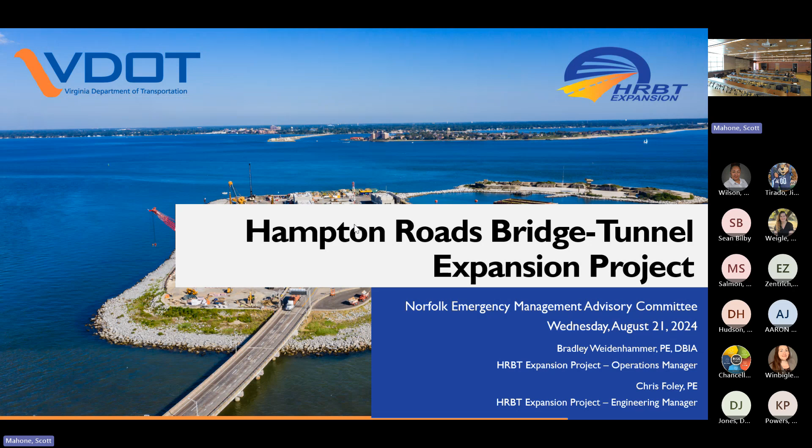So I'll give the first part of the presentation, kind of the overview of the project and some of the progress. And then Chris will follow me on some of the tunnel. Chris Foley actually works for a company called WSP, but serving as VDOT's engineering manager. We've got a team that's supporting VDOT with engineering support and construction oversight, across all the different disciplines, helping with things that come in from the contractor and construction issues.

Been in the area here for about 15 years. Most of the downtown tunnel projects. Done some tunnel inspections at one point in my career. So I've actually been in all the tunnels in the state. But I've been on the HRBT project now for 2 years. And I'm so excited to talk to you guys today and fill you in on some of the details behind it.

Great. If you could have that microphone going in and out, could you stand next to the podium there? Sure. Or if you like to walk around, you can carry that little microphone with you. Okay. That way people can hear. Yep. I'll hang out here. Feedback. All right. Hear me okay now? You should be okay with that microphone right up close. Oh, the little one, this one. All right, is that better? Button's not working. That's all right. I can do it from here. How'd you advance? Just click it. The arrows go. Okay.

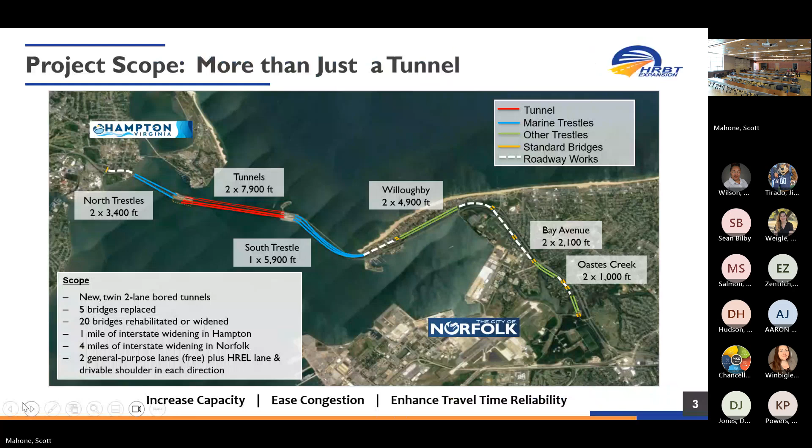So quick overview of the contract. We did award the contract in April 2019. It has a cost of $3.9 billion. It's a design build project, which, if you're not familiar with the design build process, we select a team based on qualifications, technical requirements, and always kind of a combination of those elements.

And once that contract is awarded, we typically develop a plan up to 30%. From there, they'll take on a fully finished design and construction. This project is just a design and build. Some of our other projects are design, build and maintain, or a long-term concession project, and this is not that. Once construction is done, VDOT solely will own the facilities.

The project funding is interesting in that HRTAC funded 92% of this project. If you're not familiar with HRTAC, 1% of our sales tax goes specifically towards transportation projects. So our larger projects, the express lanes, widening I-64 up on the peninsula, those projects are all funded through HRTAC. That's where most of our funding comes from, through local money, only 8% from state and federal funds. So it's really unique for a project of this size.

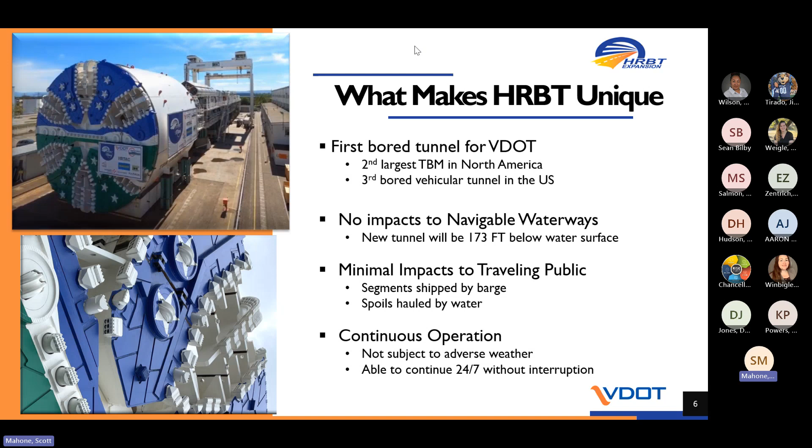So one of the benefits of using the bored tunnel is that there are no impacts to the navigable waterway. Obviously, our channel out here is a very active channel. We've got the deepest channel to a port on the East Coast, the largest Navy base in the world, so a lot of stakeholders use the channel. We're completely under the waterway, very minimal impacts. The materials to build the tunnel are coming by water, which limits the amount of truck traffic. And limited impacts by adverse weather, so you continue those operations 24/7.

So our TBM, tunnel boring machine, has a name. We put the naming rights out to some of the local schools, so this is actually a name from one of the schools, named after Mary Jackson, the NASA engineer in the movie. So some local ties there. You can see the machine, the colors of the cutter head, and the Hampton Roads flag. If you didn't know, we do have a Hampton Roads flag. The stars make up our localities, the blue and the green, the land and the sea.

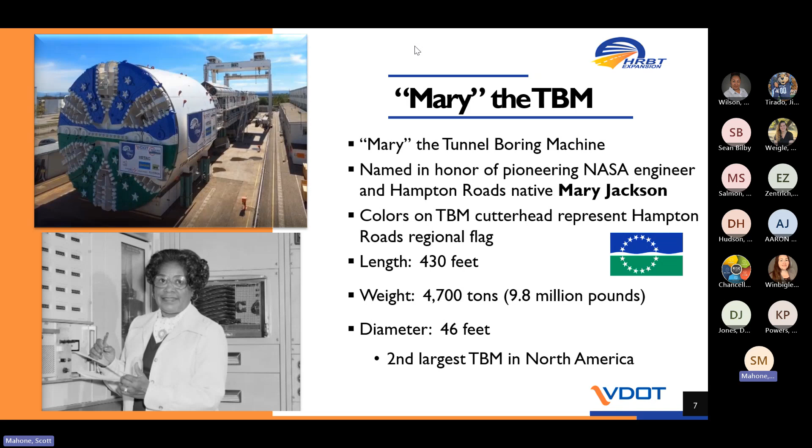So you can see some of the stats on the TBM itself. It's really a massive machine. It was built in Germany by Herrenknecht, the company that builds most of the TBMs worldwide. So that picture was actually in Germany where it was commissioned, and it was disassembled, sent down here to Hampton Roads and reassembled for use.

Hey, Bradley, I got a question. Yep. I'll ask for everybody in the room. You say the tunnel is 173 feet below surface level. So how deep do the cargo ships and the big ships travel? Because I'm always in the tunnel looking up like, how deep are these heavy ships going across me? Yeah.

How far do they go down in the tunnel? Yeah, I mean, here's a pretty good idea of that. So the existing tunnels are at 117. The existing channel depth is 72 feet. So the draft of those...

Sorry. No, it's okay. Mic issues.

That's okay. So the draft of those large ships is less than 72 feet, but if you assume they're almost to the bottom of the channel, we got a little bit of clearance to the existing tunnels.

Yep. So quick crash course in how TBMs work. It's really based on introducing slurry, which is a mixture of bentonite and water, to the cutter head. The cutter head is a piece that spins around. It creates a filter cake in front of the machine that allows us to pump that soil back through the machine and spit back out the other end. It's a slurry treatment plant that recycles the slurry, pulls out the excavated material, and sends slurry back into the tunnel.

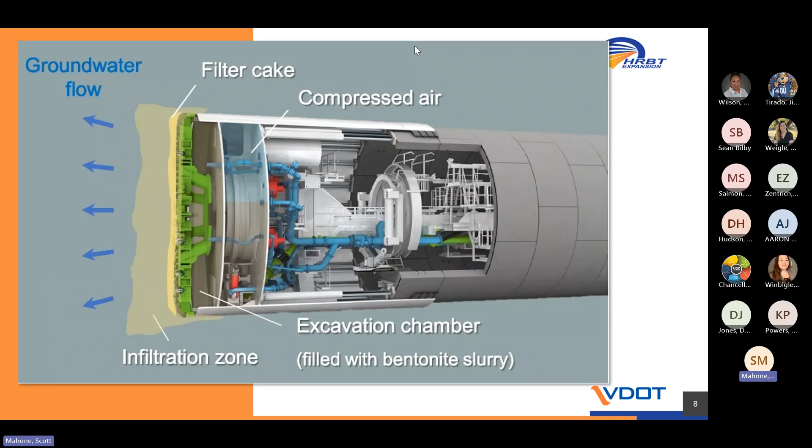You can get a little bit of an idea of how the machine works; those are the two hydraulics, pointing for the benefit of the people in the room. So these hydraulics can extend and retract. Each ring is built up of 9 segments. So once a ring is put in place, the machine actually pushes off the segment behind it, retracts, builds another ring, pushes off, retracts, builds another ring. So that's how the machine advances, by pushing off the rings that it's building behind it.

Again, this shows kind of relative to the existing tunnels where the new tunnels are. You can see this slight curvature away from the existing tunnels. That was to minimize any type of disruption or damage to the existing facilities. And you can see the depth. The new tunnels will be a 5% grade to get down as quickly as possible to some better materials, supports, or some more compressed materials.

Apparently, when you're standing next to the podium, the mic isn't working. They said they can hear you clearly when you're standing here. Okay. Would you mind? I'll stay here. No, all good.

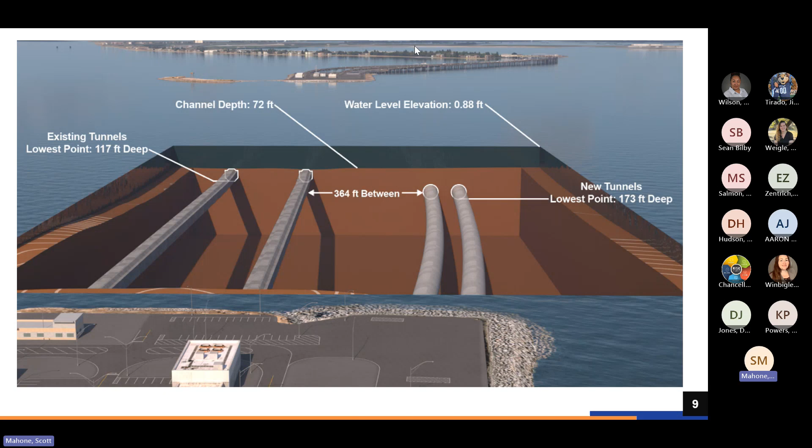So looking a little bit at what the tunnel will look like on the inside, and Chris will get into some more of the details of some of the finer elements. But one thing you'll notice is that previously, when we do an immersed tunnel, we basically build a big rectangle to put traffic in. A rectangle is a pretty good shape to fit a traffic envelope of lanes with height. The circle is not the greatest shape to put traffic in. So see, almost the whole bottom third of that tube is filled with ballast material and fill to get up to the actual roadway grade, to get the width of our 2 lanes through there.

The new tunnels will have, you can see on the left here, an egress corridor. So in the event of any type of emergency, you can go out a series of doors into the egress corridor that gets you back to the portals for safety. So that is similar to the new Midtown Tunnel, if you've been through there, but we'll have that in the new tunnel.

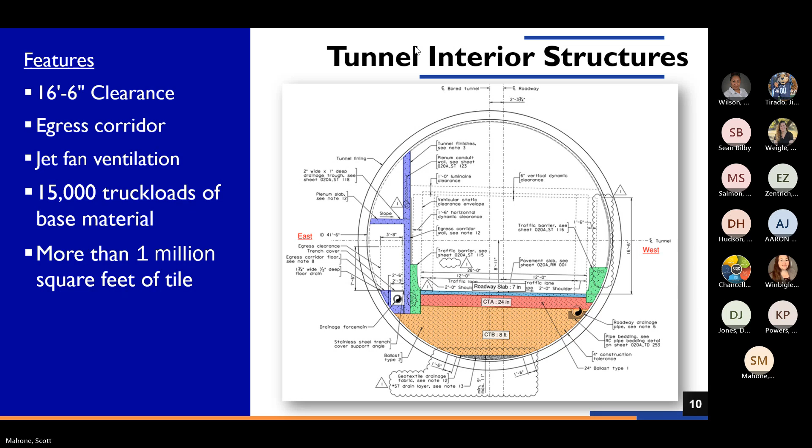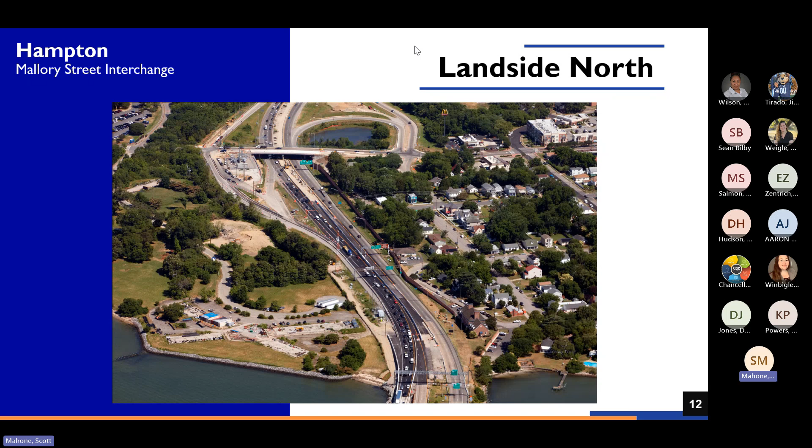So a little bit of progress to date. Again, this kind of will summarize what you've been seeing out there if you've driven through the corridor. Starting up on the Hampton side, one thing on this project is pictures aren't current for very long. We did do a major shift in the last month. This is the Mallory Street Bridge. We did move traffic onto the new half of the bridge that you can see there to allow us to demolish the other half of the bridge. That bridge is getting fully replaced as part of the project.

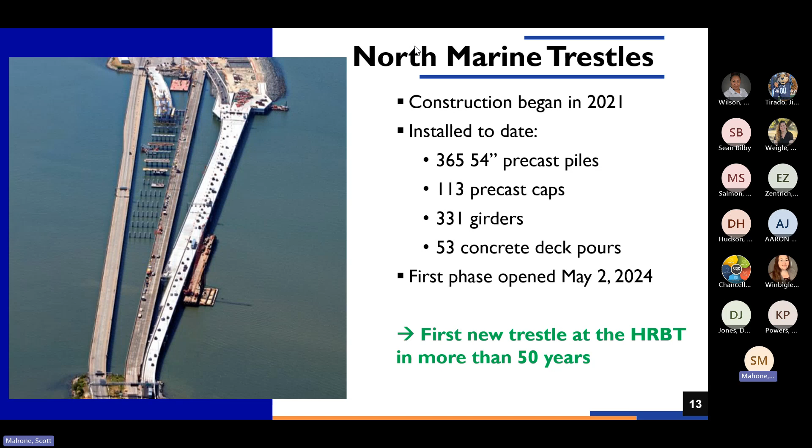So from there, we get onto the new North Trestle. So earlier this year, we did open the new North Trestle to eastbound traffic, which you can see here on the right. The reason was to get traffic there so that we can demolish the existing structure you can see on the bottom. We couldn't quite finish it because the new bridge is in the way. So with that traffic shifted, we can now complete that bridge. You can see the stats there on just the amount of piles and caps and girders that we had to put in, but it's a pretty impressive structure if you've driven by it.

A little bit on what the traffic will look like in the final configuration. Again, on the right is eastbound going into the new tunnels. On the left is westbound traffic. So you'll see the existing westbound tunnel on the far left remains the westbound tunnel. The existing eastbound tunnel in the middle there is going to become the second westbound tunnel. So again, the new tunnels will be fully eastbound. The existing tunnels will be flipped to westbound.

You can see some of the traffic numbers here. The existing year traffic that we started with, 83,000, that's an average. During the summer, we hit the 90s, almost to 100,000 certain days. But with our traffic projections, you can see we expect that to grow up to 133. So certainly capacity improvement that's needed.

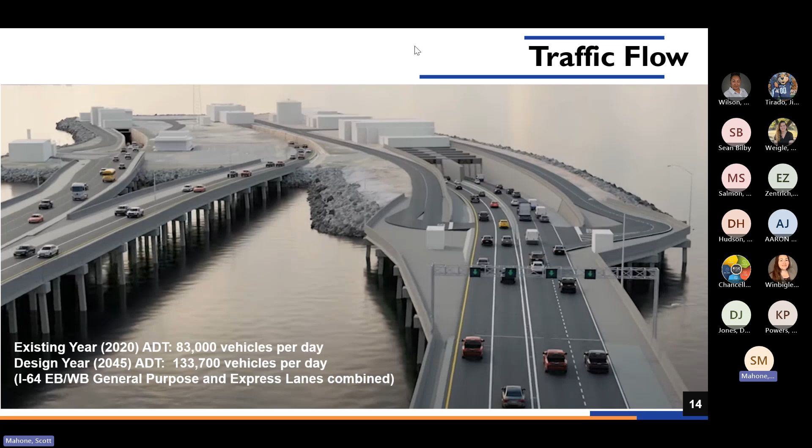We all see that. Looking at the North Island, and the North Island is on the Hampton side of the tunnel. We did have to expand that island. We more than doubled the existing island to accommodate the new tunnel landing on that side. So after we expanded the island, we built the slurry walls and the pit that we'll see here in a little bit that'll accept that new tunnel and turn it around.

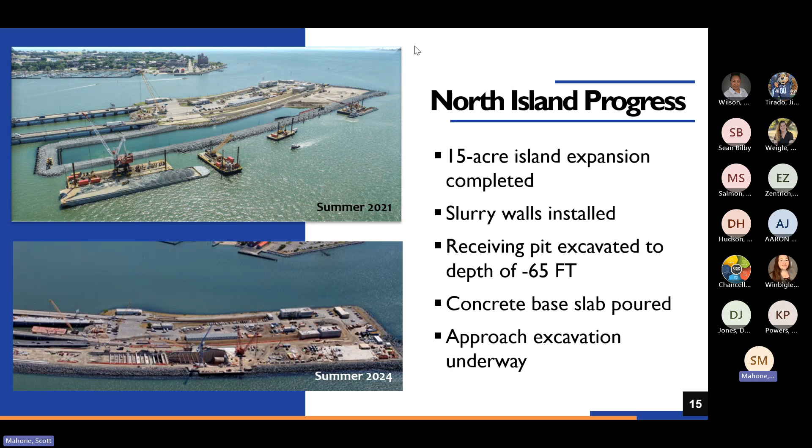The South Island, this is on the Norfolk side. This is really the home base for a lot of the tunneling operations. Kind of the bottom right corner there is our slurry treatment plant. Again, that's what processes all of the spoils coming out of the tunnel. Just given its size, it's hard to see in this picture, but it is a massive facility. It wasn't feasible after the first bore to move this over to the North Island. So this will be the center for all the tunneling operations for both bores. So as the tunneling comes back towards Norfolk, all the spoils will continue to come to this location.

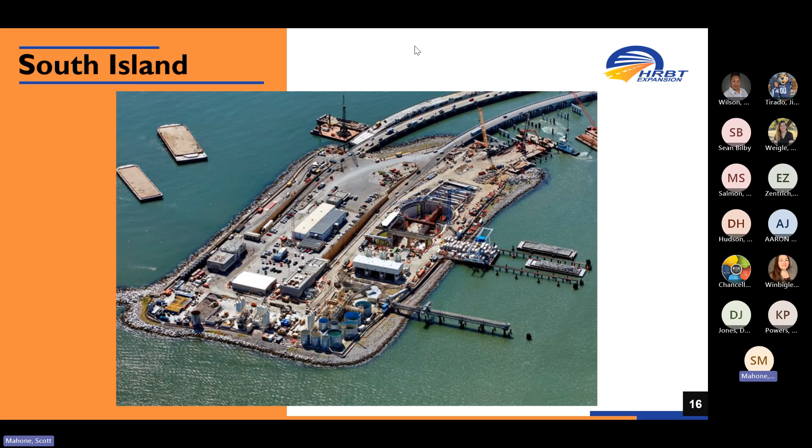A little bit more of a close-up of the South Island pit. Again, all the tunneling operations will remain here, and we are starting to put some definable features in that pit now. So while the left side of that is the head wall where the tunnel bored through, really the right side of that picture is where you'll see daylight when you come out of the tunnel when it's fully constructed. So everything above that pit will become the support buildings for that tunnel.

So you can see that dividing wall in the middle there that separates the two eastbound, the general purpose lanes and the HOT lanes. Everything else in there will be a series of pump rooms, electrical rooms, just all the pieces that it takes to run the tunnel.

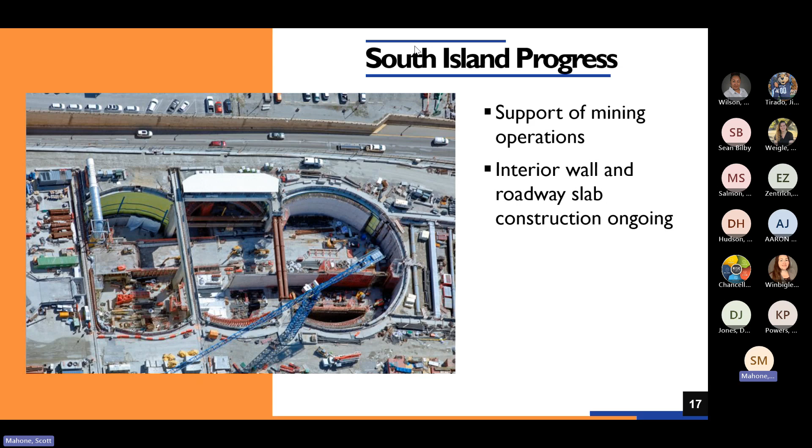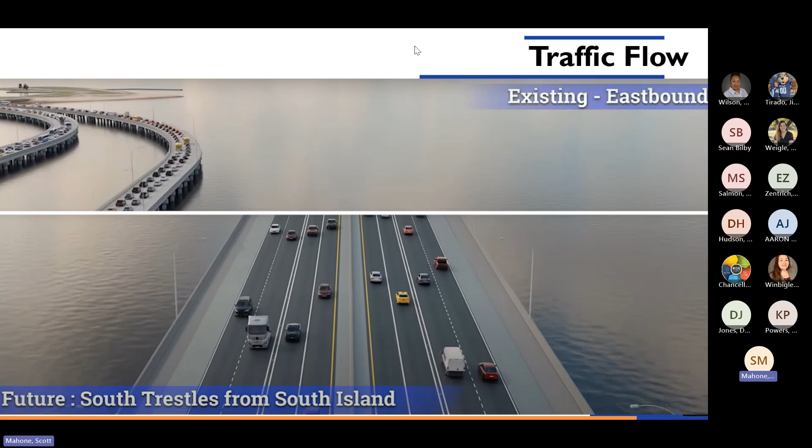So again, this is the South Trestle on the Norfolk side. That line in the middle, you can almost picture that as a cut line where above is the existing and the bottom is the proposed. So the existing trestles at the top completely get demolished. We're building the new trestle off to the side, which you can see here. If you've driven by it, you probably notice it's significantly taller than the existing bridges. Couple of reasons: resiliency, projected sea level rise, and also just to get it out of the splash zone there. Salt is sort of the enemy of bridges, so get it up higher so we get less salt on our bridge elements.

So we are expecting to move traffic onto that structure in spring of 2025. So a lot of work happening there, and we are getting close to that first shift. Again, you can see towards the bottom, we aren't able to complete the full structure because we're bound by the existing. So we need to get traffic onto the new to be able to start to demolish the existing ones and complete those structures.

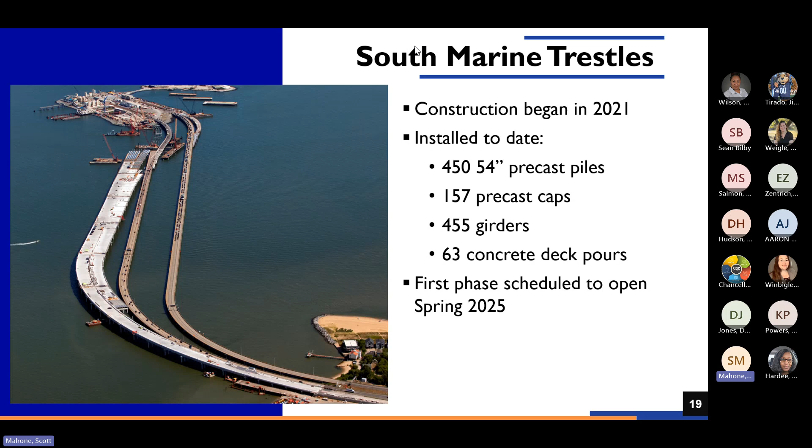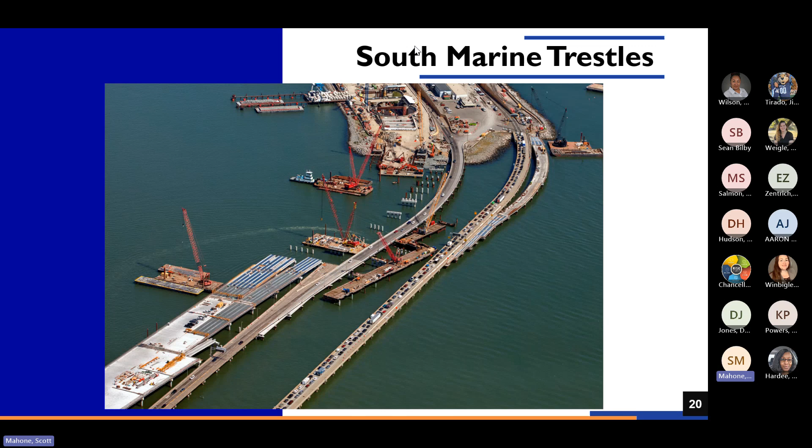This is kind of a close-up closer to the islands. On the left side there, you can see we did build a temporary trestle, that little bypass to put traffic on so that we could demolish the existing piece. On the right, you can see the temporary trestle that we will be moving traffic onto later this year. And again, once we get traffic there, we can demolish the existing to be able to complete the permanent tie-ins to the tunnels.

Landside progress, really a lot of the work there is just the widening activities. All the bridges need to be widened, Willoughby Bridge being the longest. We also have a lot of shorter bridges in the corridor. We are rehabilitating all the bridges as well, in addition to widening. So we're doing a lot of work on the beams and decks and different elements so that when this project is done, we'll be able to just be doing routine maintenance for the foreseeable future.

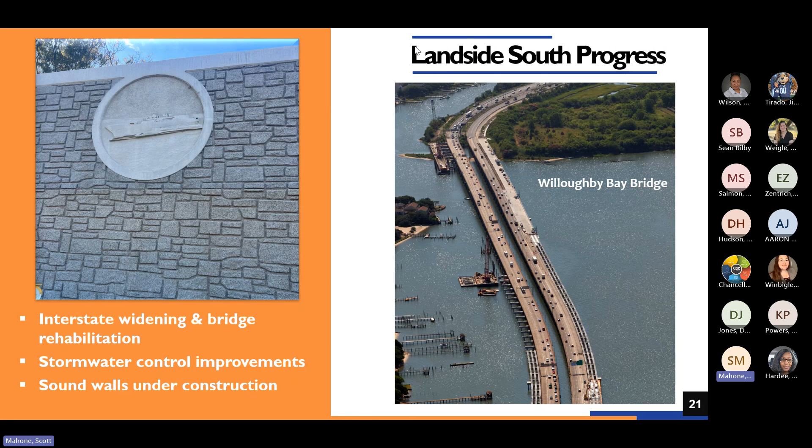Did want to highlight some of our maintenance of traffic and incident management, some of the considerations that we put in. So during construction here, we will be maintaining 2 lanes at all times, the 2 lanes that were existing. Obviously, lane closures are a part of the work, but those are limited to allowable lane closure hours that we have defined in the contract. So they're generally nighttime.

It's a full matrix of allowable times depending on the day of the week, depending on summer, non-summer. So they are limited to those lesser travel times for doing lane closures. We do put out a weekly advisory. If you're not familiar, you can get on our mailing list and check our website for those weekly advisories of when we're doing lane closures.

As far as emergency management, there's an existing hurricane crossover just west of Fourth View. So there's a provision in the contract that maintains that crossover throughout construction. So with very limited notice, they would be able to make that passable so we could use it for any type of reversal that we do in the region.

The contractor does have a dedicated incident management coordinator, so they are on site full time. So any minor incidents or major incidents, we can respond quickly. Part of that, they do have a requirement that there's a wrecker staged in the corridor full time, so that we can again quickly respond to incidents and clear. With the work zone, most of it is barrier on both sides. There really are limited places to get by. So the quicker we can clear those incidents, the quicker we can get traffic moving.

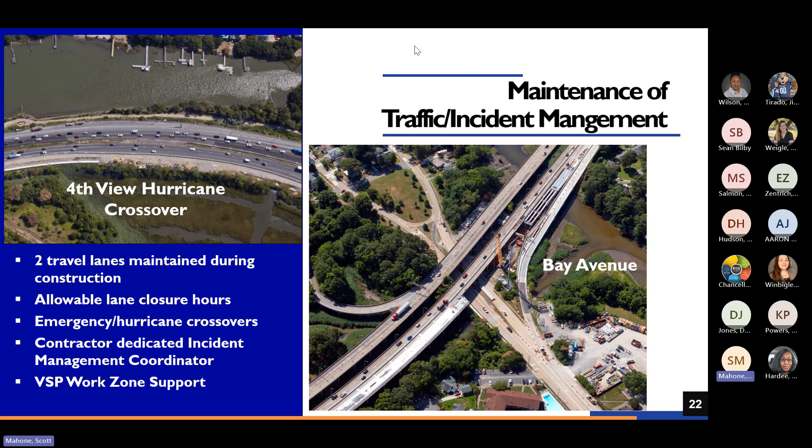And then we also do utilize VSP for work zone support. So you probably see them out in our work zones most days, trying to keep people slowed down and focused on the task of driving.

Getting into the tunnel work, here you can see this is the South Island. This is just before we started boring operations. The TBM setup on the left side in the tunnel is the cutter head. That's the piece that leads the boring. Behind it are 3 of the trailing gantries, and then just below the back end is the 4th gantry. So we actually had to advance the machine to even fit the 4th gantry onto the machine as it continued through.

Towards the bottom of the picture is our quay for the tunnel segments. So all the tunnel segments were fabricated in Cape Charles and barged down to the site. This is where they're loaded up. And then that large gantry at the bottom lifts them down into the pit where they're delivered down to the cutter head.

One other thing I'll mention here, there is a joint agreement between City of Hampton and City of Norfolk Fire. They are our tunnel rescue team. So in the event we would have either a major injury or fire down in the tunnel as it's being constructed, we have purchased special equipment for them to respond to that unique scenario. We've done a series of trainings with them. So I think that's a good news story of collaboration regionally and with the project.

And really those teams are out on a monthly basis, just looking at the site. Things are changing out there almost daily. So they're always keeping situational awareness of what the active construction site looks like in the event there would be any type of incident or any type of rescue required.

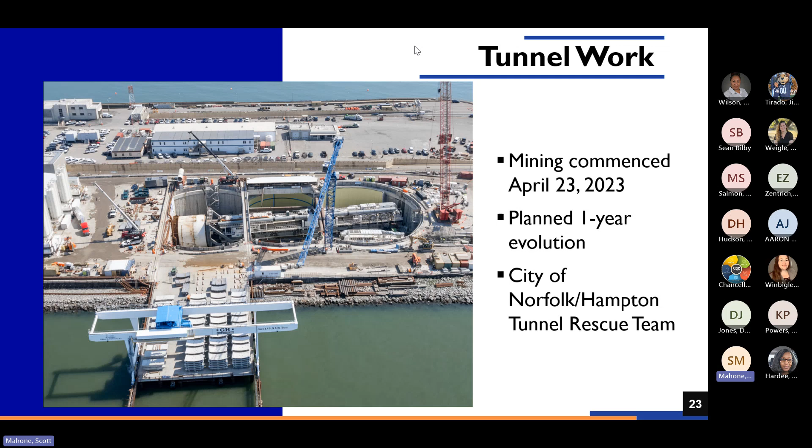So the first tunnel we bored, that we launched from the South Island, was the HOT tunnel, the high occupancy toll lane tunnel. You can see some of the stats there, but almost 8,000 feet, 1,191 rings. Again, every ring is made up of 9 of those tunnel segments. The photo on the right is our ring erector. There's a large vacuum that actually picks up the pieces and spins it around, puts it in place as we bolt it. And you can see the hydraulics there that we push off of those ring segments to advance the tunnel.

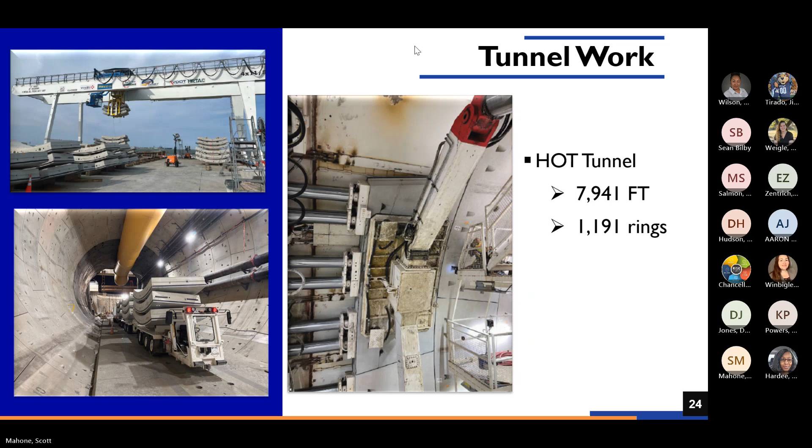So after we got 7,941 feet, it took almost a year to get there. You can see some of the rates of our best days of 17 rings, just over 100 feet, 50 rings in our best weeks. So this is a big system of sending materials back to the South Island to get treated, delivering the segments. So no one process can get ahead of the other. It's sort of a balance of moving and treating materials.

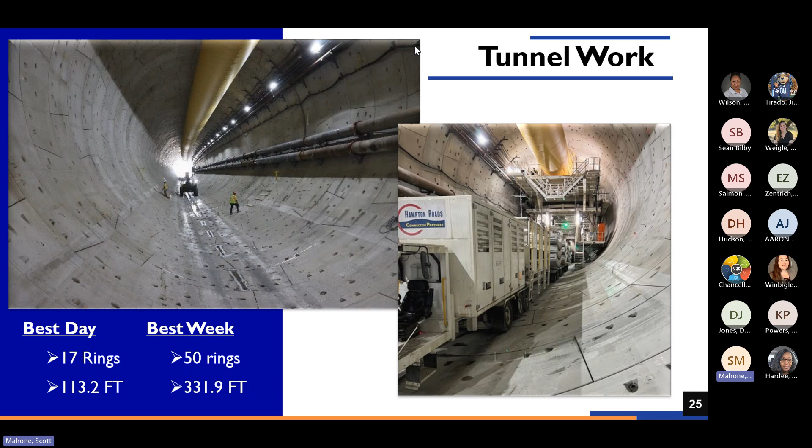So you may or may not have seen this video, but earlier this year we did complete the first tunnel. So it's documented.

It's pretty cool, right? That's not something you get to see every day. First time I've seen it personally. First time we've done it here in Virginia. So again, this officially made us our first bored tunnel in Virginia. Bay Bridge Tunnel is currently boring, but we did complete first, so we get to always say we were the first one to break through.

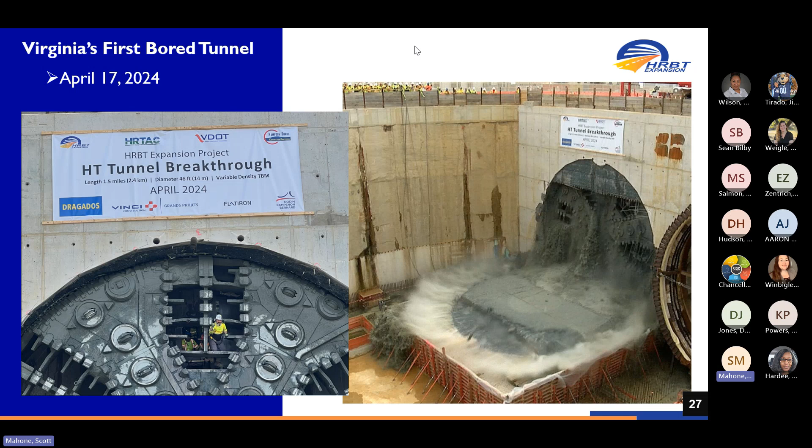So now that we are through, we got to turn around and go back the other way. So one of the bigger challenges on the project was figuring out the logistics of doing that. You can see our cutter head's 2,500 tons. So we couldn't really use cranes to pick it up and move it around. So the contractor utilized a method that's been used in Europe, not to this scale. This is really the largest scale that's ever been done.

But underneath the cutter head is what we call a air skate. So they sent basically compressed air in there. On the very bottom are some rubber bladders. The bottom of the floor was lined with steel plates that they put lubricant on. So by introducing that compressed air, it reduced the friction. They were able to use those pulleys and actually pull it around the floor back into place.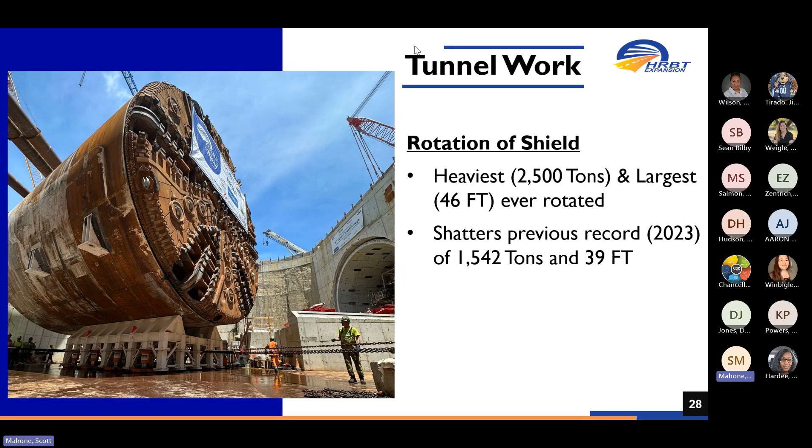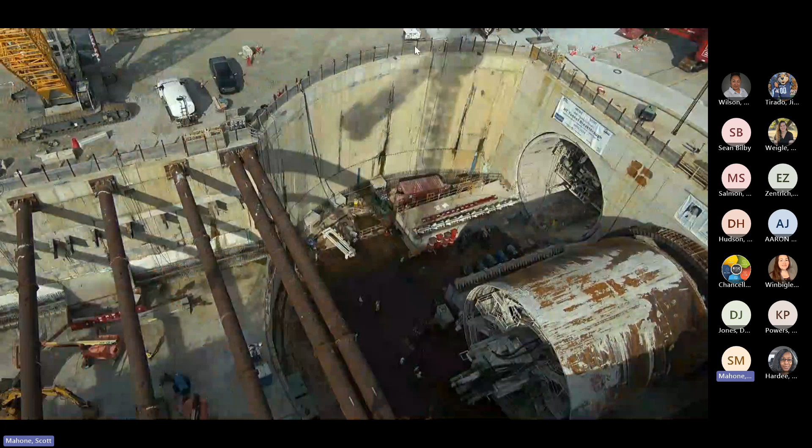So we have a time lapse of that. So this actually all took place within an 8-hour shift. So you imagine 2,500 tons. They just started pulling it around on that skate. So the best way I can describe it is when you're moving furniture, you kind of put the pads underneath and slide it around, kind of mixed with an air hockey table, the air kind of just reducing that friction. So that's how they turned it around.

So that happened just a bit ago. Actually, since then, the first gantry has been pulled out, turned around. The second gantry actually just came out this morning. They lifted it up top. They're going to turn it around and set it back down. So again, we have 4 gantries to turn around, and then sometime around October this year, we anticipate boring again to head back to the South Island. So that's the progress of tunneling.

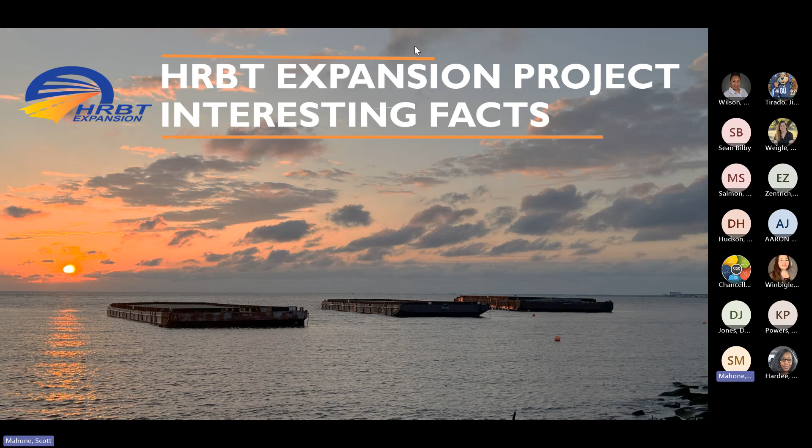Looking at a couple just unique things that probably weren't as expected on the project. Here's a picture of just 3 barges in the background. We'll get to why I'm showing a picture of 3 barges. So with really any federal state project, we do have civil rights goals. So they're always usually based on a percentage of a contract. When you have a contract this large, those numbers just get very big. But I'm proud to say that we are meeting all of our goals on the civil rights side.

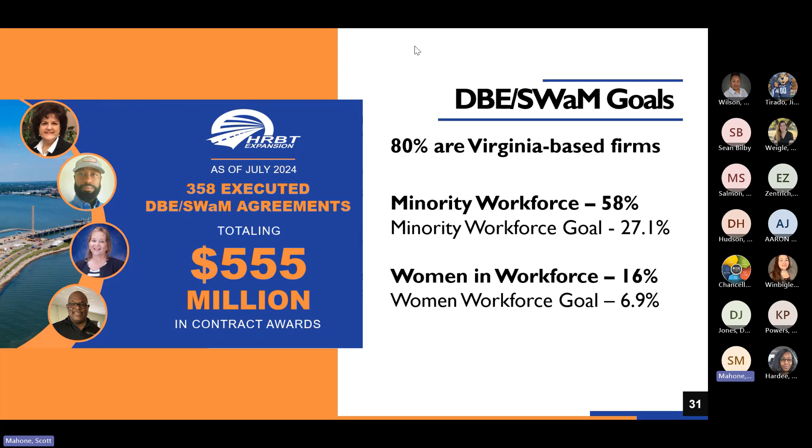Environmental challenges, that was a big risk going into this project. If you haven't heard, the South Island, which again was only built in the 50s, became home to the largest colony of colonial nesting birds in the world. That's just where they decided to migrate. So it's some terns and gulls and different protected species, but that was their home during bird season, which is about April to September of every year. So anytime they would lay an egg, we would have to create an exclusion zone, and really it would have impacted the project in a great way.

So that was a big good news story for the project. We were able to accommodate those and still move on with construction. So we've really had very little impacts during construction based on the birds.

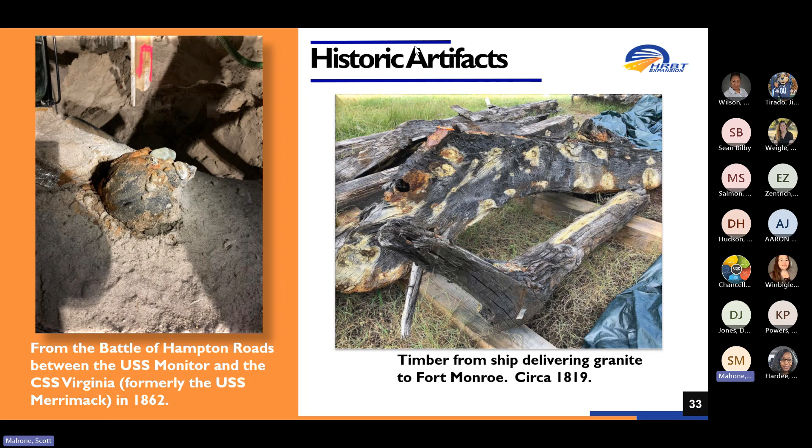And then the one that really nobody had on the bingo card: during the process of excavating materials, all the material comes out on a conveyor. There are some magnets that pull out any metal debris, and people are just looking at it for any abnormality to make sure we're not boring through anything that could potentially damage the machine. But someone did take note of some pieces coming out that, working with our Virginia Living Museum, were determined to be mastodon bones from about 50,000 years ago.

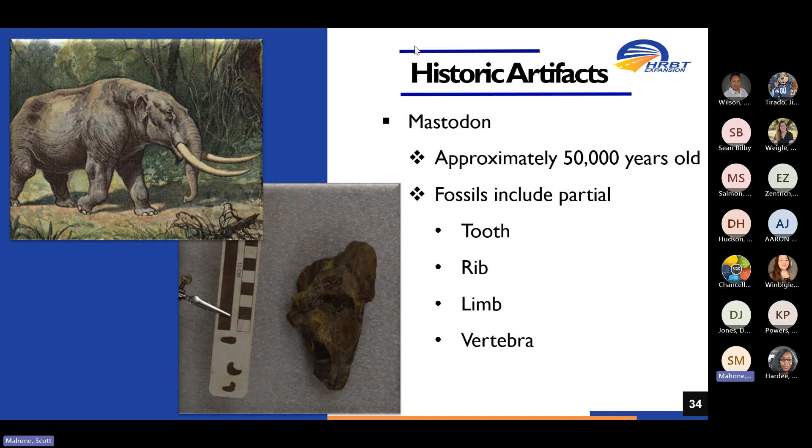So these were found under the surface. These kind of just demonstrate that this was coastal plains a long time ago. This is the furthest east we found any bones of this type. And again, those are on display at our visitor center, so we hope one day people can come out and take a look at those. That's probably one of the more interesting things that we found through tunneling, and probably the most unexpected.

So before we move on to Chris to talk about some of the specific safety elements of the tunnel, I'll pause if there are any questions from the room or online on any of the progress, anything you're seeing out there. All right. If not, we'll move on to Chris, and we can certainly circle back at the end for any final questions.

Thanks, Bradley. Before I get started, I'll say I did get the chance to be down in the shaft and see the breakthrough happening in person and the TBM U-turn. The scale of these things is really hard to convey in these pictures, but it's taller than a 4-story building. So when you're standing right next to it, it's really just a massive machine. It's really neat to get to see this stuff up close.

I do have one question. They asked, what's the drill's nickname? The name is Mary, the TBM that we went through before. I'm not sure if that's what they were asking, but Mary, after Mary Jackson, the NASA engineer.

Thank you. So I'm going to dive in a little bit to the design of the fire life safety systems in the tunnel and some of the considerations that went into that. Tunnel safety standards have come a long way since the original tunnel was built. This tunnel really does have state-of-the-art safety systems, many of which are not found in all the existing tunnels that we have. Probably the closest other tunnel to this one is the Midtown Tunnel, open to traffic in 2016, 2017. But even this has some additional things since then that have become part of the safety standards.

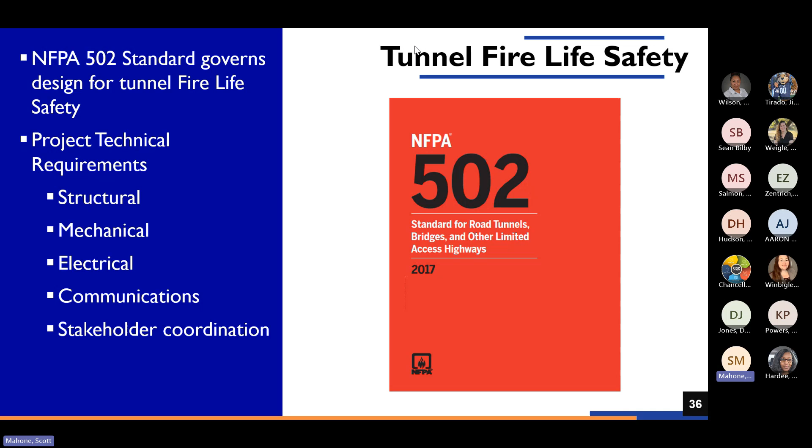So we had specific requirements for the structure, as well as the mechanical and electrical systems, the communication systems, as well as coordination with first responders and other stakeholders, and VDOT operations, who would actually be using these systems in the event of an emergency. So we had a very detailed set of technical requirements that they had to follow. Part of my role as the engineering manager was looking at the design packages as they come in and making sure that they're complying with that and addressing everything that's needed in the design. So we'll just touch on some of those subjects, and feel free to interrupt if you have questions.

So starting very early on in the process with regular meetings to review how the design was coming together, making sure that all the pieces and parts that we're seeing with the design were what we really needed in terms of operations, maintenance, and that sort of thing. One requirement that we have in the contract is for the design builder to develop an emergency response plan before the tunnel is open to traffic, and that has not been done yet, but it's a key aspect of this job that will involve this fire life safety committee.

So thus far, we've had, I think, 7 meetings over the last few years to review the different parts of the design. Most of the design is now complete. There's a couple of packages still outstanding, but the next major milestone is once we actually get it built and we get it commissioned and tested, we're gonna have to develop this emergency response plan and coordinate with all of the first responders and make sure that we've got a comprehensive plan for how these systems will get used and how people will access incidents in the tunnel and things like that.

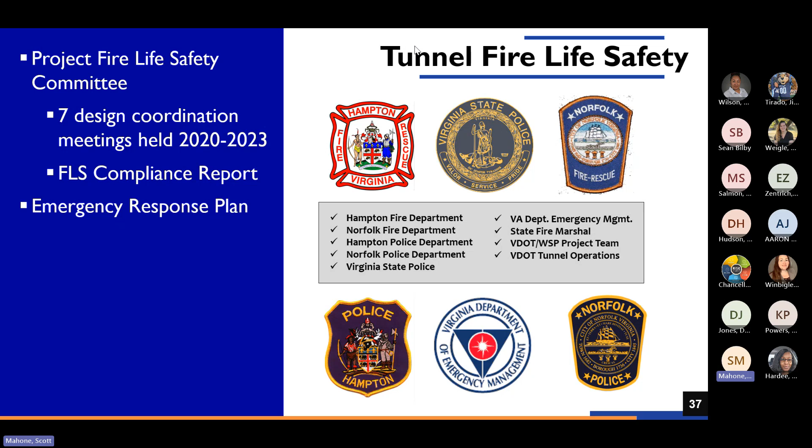We've also got a fire protection system consisting of a combined standpipe deluge system, and we'll talk about that a little bit. And of course, we have fire detection systems, emergency communications. We'll talk about traffic control, as well as the drainage and the flood protection that we have in the event of a coastal storm.

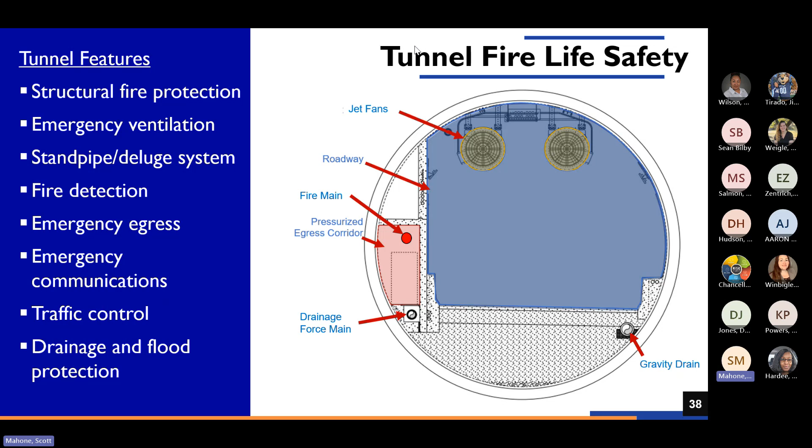So starting with the structural fire protection, the latest edition of NFPA 502 requires us to protect the structure itself from fire to prevent damage to the structure and alleviate the risk of having a structural collapse due to fire. And that's based on several incidents that have occurred at major tunnels throughout the world. But the way that we do that here at this tunnel is with passive fire protection board. It's essentially an insulation board that gets bolted to the concrete surface of the tunnel lining, as well as the interior wall there. And it prevents the structural damage during the exposure to the fire. And the goal of that is to keep the surface of the concrete, as well as the reinforcement, less than 482 degrees.

So the contractor designed this board. They had a finite element analysis that showed how this was going to perform. And they're actually now in the process of developing their testing plan. We do have a requirement that they have to actually do a scale test where they expose the actual boards on a test segment to the fire event and make sure that it actually performs the way that we want it to during the design. So that's actually coming up here soon. We've got some testing scheduled here in the next couple of months.

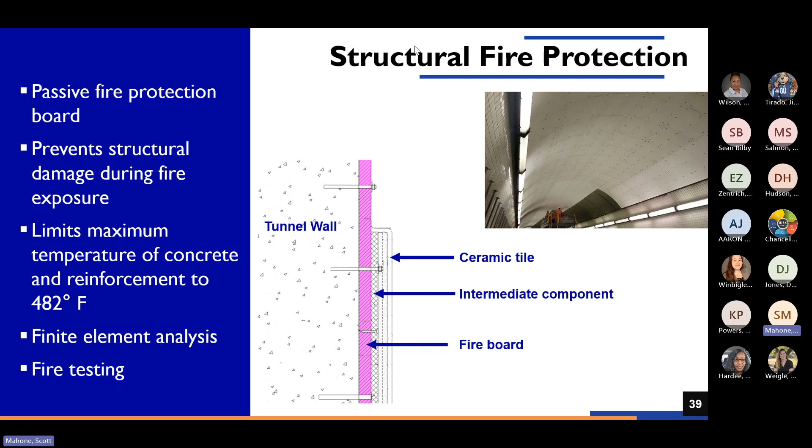The pictures there you can see on the right is what this will look like. In some ways, that's got the fire protection board that is on the ceiling part of the tunnel and then tile below it. We have a similar arrangement. Our coloring will be a little bit different, but the same basic idea. It just provides that surface protection for the concrete.

Emergency ventilation is very important in tunnels, particularly longer tunnels like this one. Portal to portal, we're roughly 8,500 feet because the bored tunnel actually has a section of cut and cover tunnel on each side as you go through the approach structures. But the jet fans are mounted overhead. We've got 12 banks of jet fans in each tunnel, 2 fans in each bank, so 24 jet fans in each tunnel. And basically what these allow us to do is to move air longitudinally through the tunnel.

And in the event of a fire with traffic stopped behind the fire site, we can push that air downstream where traffic is cleared out and keep that smoke and heat from backlayering over traffic. The fans are also fully reversible. So if we need to, for some reason, we can actually reverse them and send the smoke the other way once people are evacuated.

The egress corridor, as I've mentioned, has got its own pressurization system. So there are ventilation fans located in the tunnel buildings on the islands that pressurize that. But then there are also booster fans, as you can see in the cross section there, mounted on the ceiling of the egress corridor. And those provide additional pressure throughout.

There are pressure relief dampers and sensors that make sure that we're maintaining the right amount of pressure. And it's kind of a balancing act between making sure that we're providing enough pressure to keep smoke out of that corridor when somebody's opening the door, but not so much pressure that we make the doors difficult to open.

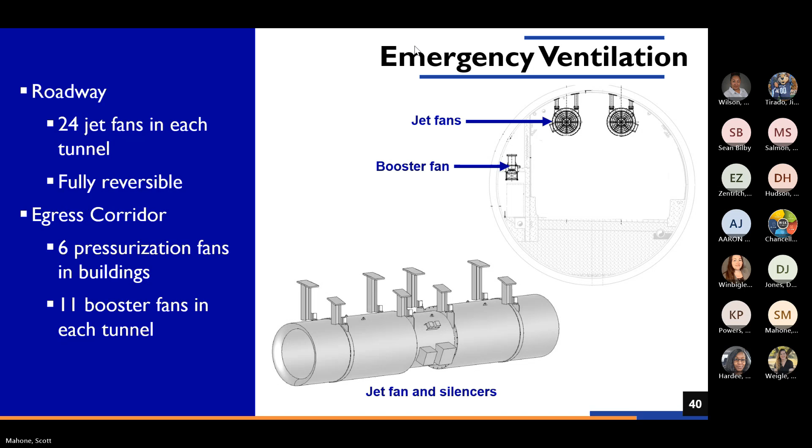We also have a fire protection system. It's a combined standpipe and deluge system. So there's a wet fire main running in the egress corridor throughout the length of each tunnel. That is actually fed by 120,000 gallon water tanks located on each island. And then we've got fire pumps in each building. We've actually got 2 pumps in each building, so we've got extra redundancy. Essentially any one of those pumps can run the entire system. So we've got double redundancy.

So from that wet pipe, you have hose valves that go to the cabinets along the roadway that firefighters can hook up their hose to. But we also have deluge valves that connect it to dry piping over top of the tunnel roadway. And that's what you see in the top right picture. There's sort of that red piping.

There are zones about 80 foot long throughout the tunnel, and those have open sprinkler heads. And so when a fire is detected in a particular zone, that deluge valve opens, sends the water to that dry piping, and you have sprinklers to suppress the fire in that area.

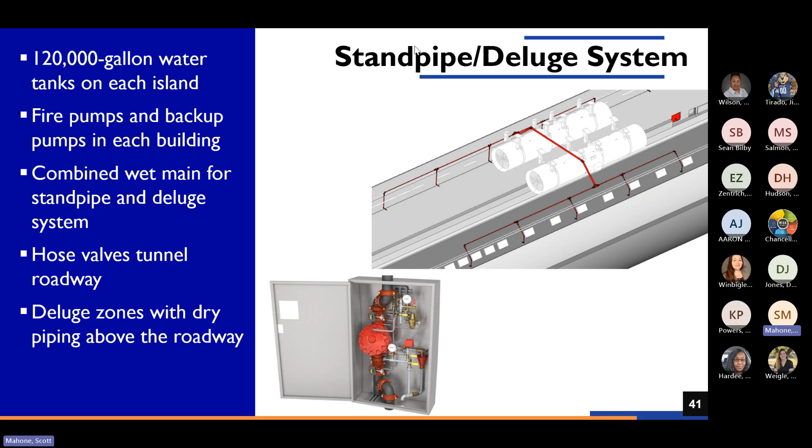For fire detection, we have a couple of different ways that fires can be detected in the tunnel. First off, we have the CCTV cameras. We have 100% coverage throughout the new tunnels. Those feed back to the control room where VDOT operations are constantly monitoring the flow of traffic 24 hours a day in the tunnel and can respond to incidents. We also have manual fire alarm pull stations like you'd see in a building located in the tunnel in the egress corridor.

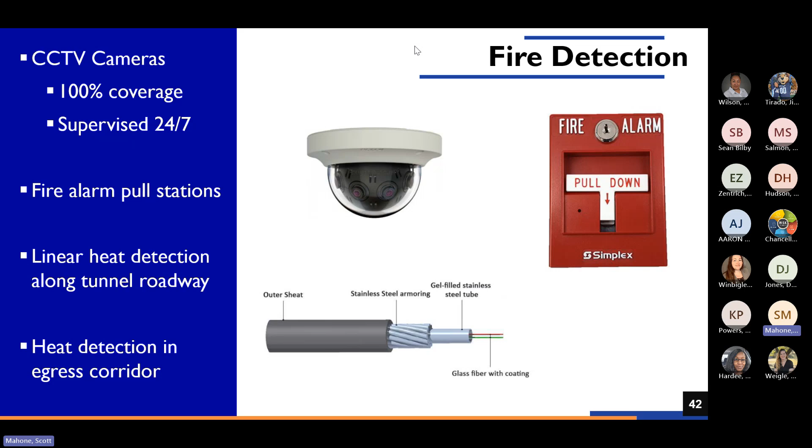And then we have linear heat detection along the tunnel roadway. That's actually a wire loop that runs the length of the tunnel. And when it reaches a certain temperature, it can actually tell where along that wire the fire is located and will trigger a response. That's tied into some of the other systems like the deluge system and the ventilation system, and we'll talk about how those come together. And then we've also got heat detection in the egress corridor, and the more typical heat detectors and smoke detectors in the buildings themselves.

We talked a little bit about emergency egress, but this was an important part of the design that was challenging to accommodate. We have 13 sliding egress doors throughout the tunnel, similar to what you see at the Midtown Tunnel. And there's signage directing people with that green running man symbol that's become adopted for emergency egress. But the designer actually had to do quite a bit of modeling of various scenarios in the tunnel with fires to make sure that the door spacing was correct, and looked at the maximum queuing of people trying to evacuate.

So that was kind of done hand in hand with the analysis of the fire protection system and the ventilation system, because you're trying to make sure that you provide a tenable environment in the tunnel for as long as it takes to get everybody out through the egress corridor, because that fire is growing over time. And so, the ventilation system's keeping the smoke off of traffic behind the fire. The deluge system is suppressing the growth of the fire, and make sure that we can do that for a sufficient length of time so that everyone can get out of the tunnel safely.

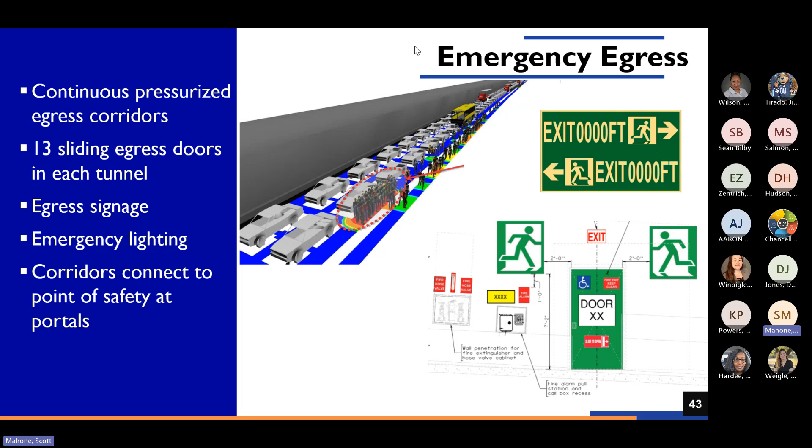We have egress signs throughout the tunnel that'll tell people the distance to the nearest exit. We've got emergency lighting. And these corridors, essentially, they run the full length of the tunnel, and then they connect to a point of safety at the tunnel approach structures. They connect to an area of refuge, and then a stairway that leads up to the building that puts you out at grade on the islands.

We also have several emergency communication systems in the tunnel. We've got the AM/FM rebroadcast system, similar to what the existing tunnels have, where VDOT has the ability to override the AM/FM broadcast in the tunnel if drivers have their radio on, and we can provide emergency messages that way. We also have a mass notification system with loudspeakers in the tunnel, so we can provide emergency messages to motorists.

Call boxes with emergency telephones throughout the tunnel. We have two-way radio system coverage throughout the tunnel and the facilities. And then we've also got some requirements in our contract with provisions for installation of the STARS system by Virginia State Police.

Not be able to connect through that radio system, right, to broadcast the emergency message? I believe that's correct. That is just AM/FM override. Yep.

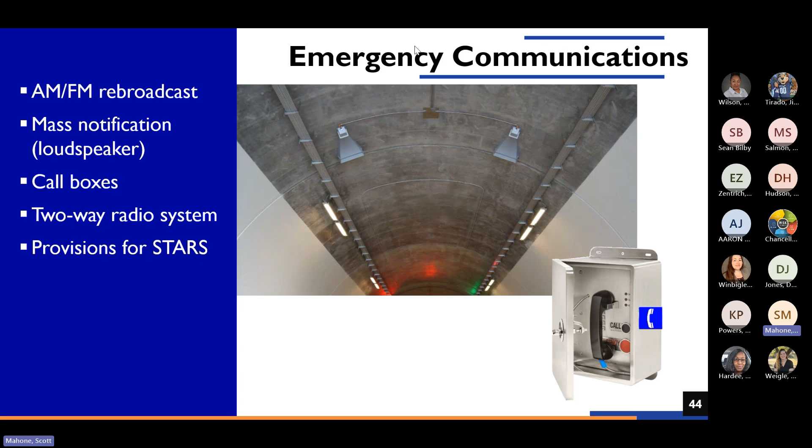So NFPA tells us that we have to have a way of stopping traffic from entering the tunnel in the event of an emergency, as well as clearing traffic downstream from an incident. So what we have is a combination of traffic control signals and message boards outside the tunnel on the approaches, with one right before each portal as you're going into the tunnel, similar to what we have today. That allows us to quickly stop traffic. If there's an incident detected, VDOT can do a full stop.

There are also lane use signals throughout the tunnel, displaying either a green arrow or red X, like you see in some of these pictures here, that will be in the tunnel. There's also dynamic message signs in the tunnel. We've got vehicle detectors throughout the tunnel that allow VDOT to understand what's happening in terms of vehicle presence and queuing inside the tunnel and things like that. That's all going back to the control room.

Yes. Yeah, that's just an example from a different project, but that's a dynamic message sign. It can be changed with different messages depending on what the incident is. Yep.

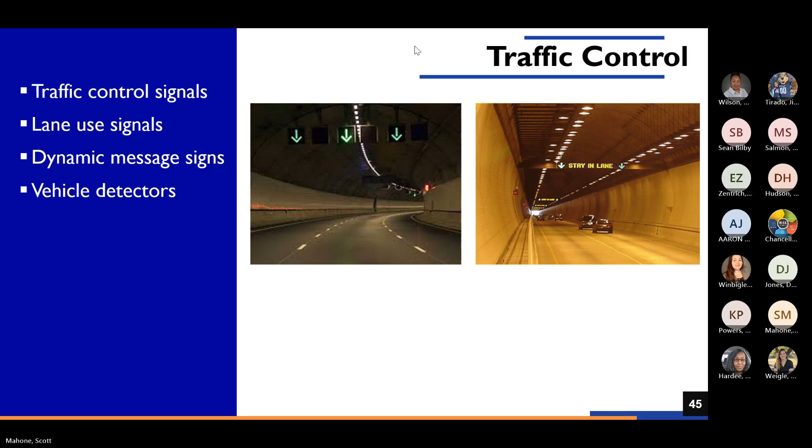So drainage doesn't maybe seem like a fire life safety system so much, but it actually is a requirement of NFPA 502. Probably the controlling situation for the drainage system in the tunnel is dealing with all of the water coming from the fire protection system. We have drains that intercept water falling outside the tunnel, keeping it from going into the tunnel itself. But as you can imagine, when we made a couple of these deluge zones that are 80 feet long, we've got a huge volume of water to deal with. So that basically all flows down to the low point in the tunnel.

There are inlets spaced throughout the roadway. And you can see the low point of the tunnel is not really in the middle. It's kind of closer to the North Island there. And that has a pump station. Pump station cutaway is kind of shown in the top right there. But we've got multiple submersible drainage pumps that can pump that water out, and it pumps it to a pump station at the portal. And that pump station then discharges it out to the bay.

We also have floodgates at the portals. Similar concept to what we have at the existing tunnel. But essentially when we have an elevated water forecast from a coastal storm, we can lower these floodgates right at the portal and block off the tunnel in case the walls of the approach structure were overtopped with water. So that's designed to hold back water and fill up that entire approach section of the tunnel until the storm is passed. It can be pumped out, and it basically protects everything that's in the tunnel from being submerged.

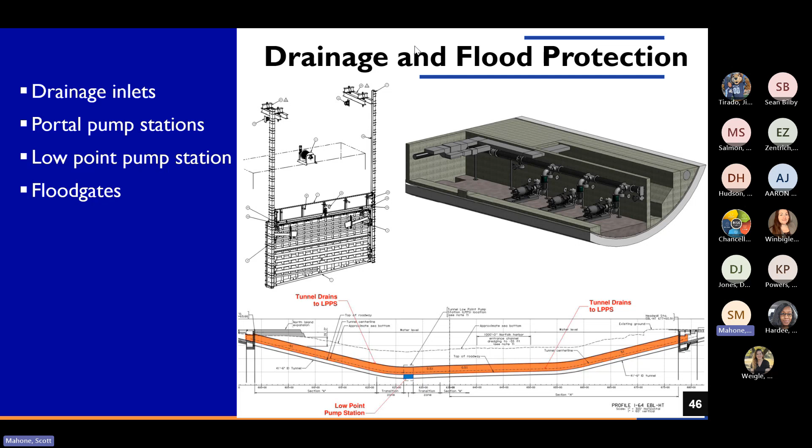So in the event of a power outage, typically if we lose one side, we can reroute power from the other side. But if we lost both utility sources, which can happen during a big storm event, we have generators that can provide the backup for the entire facility. Sure. Yeah, we might talk about that here when we get to the SCADA system.

So the SCADA system stands for Supervisory Control and Data Acquisition, kind of a mouthful, but it's essentially the brain that talks to all these different systems and integrates them together so that you can have a unified response between all these various systems acting together to create a safe situation. So the picture on the right there is an example of a video wall in a traffic operations center. We will have a similar type of arrangement here for the new tunnel.

So there will be a primary control room where VDOT staff have the ability to monitor, operate, control all of the new tunnel systems as well as the existing tunnel systems. Then we will also have a secondary control room in the event of an emergency that required evacuation of the primary control room. We have full capability to do all those same things at a secondary control room with a similar style of video wall and workstation.

One of the things that the SCADA system does is helps to minimize operator error. So there are a lot of pre-programmed emergency modes. Typically they still have the ability for the operator to intervene, override as necessary, but there are a lot of pre-programmed modes where based on a fire at a certain location, it will allow a specific response from the ventilation system and the fire protection system.

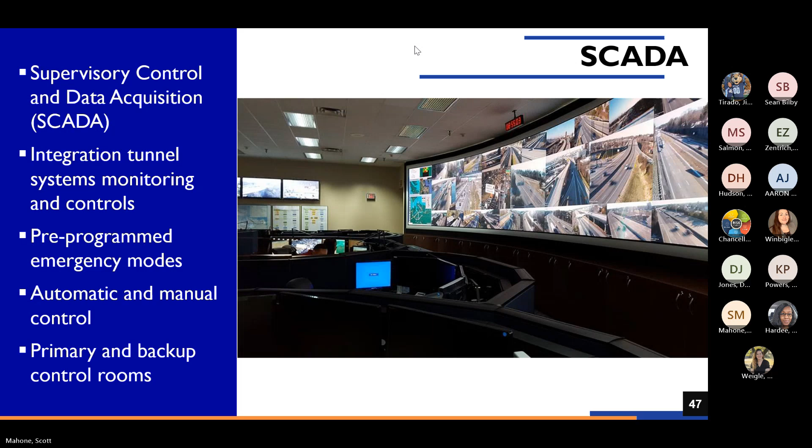So I thought it would be useful to just kind of walk through what that actually looks like. This is a series of 3D graphics that was prepared by the tunnel designer. So during normal operation here, you've got traffic flowing through the tunnel. You can see the red pipe above the roadway is the fire protection system. The jet fans are sort of the white cylinders.

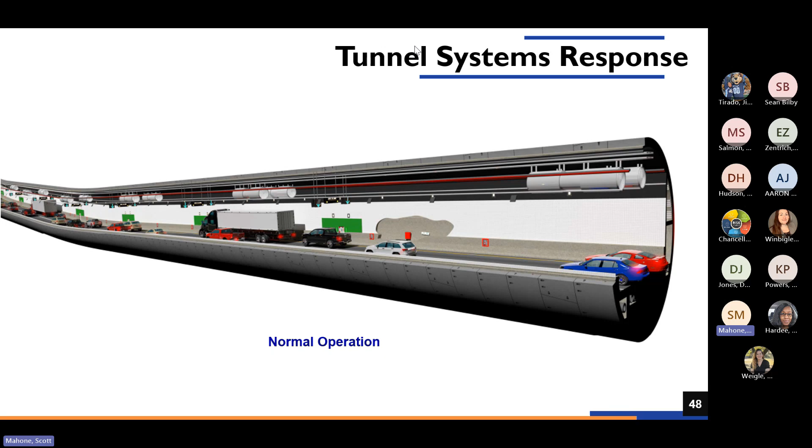So if we detect an incident, essentially a car stops and catches on fire in the tunnel. And smoke will start to emerge from that fire. Depending on its location in the tunnel, that smoke may start to travel uphill, back over traffic. At this point is when the systems are actually detecting that, hey, there's an incident here.

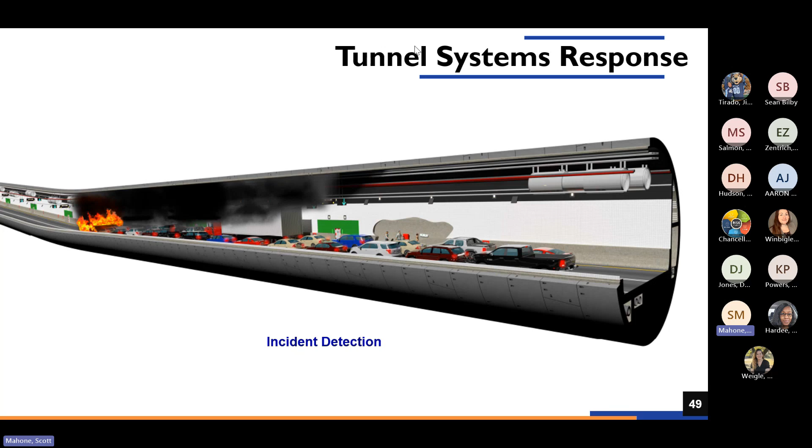Many times VDOT will be able to see this on the cameras, know there's something going on before we get to a situation where the linear heat detection system needs to be triggered. But once that happens, the emergency ventilation can be activated. And you can see now that smoke is all being pushed away from traffic stopped behind the fire. And that's the goal of that longitudinal ventilation system.

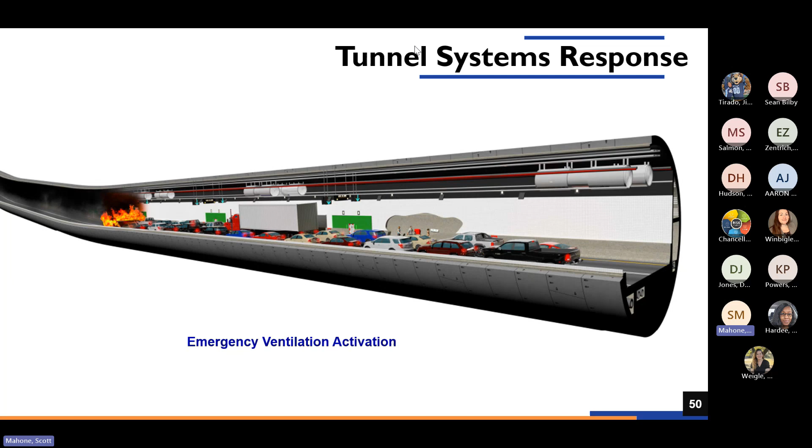People are now starting to evacuate through those green doors. That's where the sliding egress doors are, into the egress corridor, and be able to get out of the tunnel. And then here you have a combination of the tunnel ventilation system and the deluge system operating together to help suppress that fire. So really all this stuff needs to work together for it to improve safety.

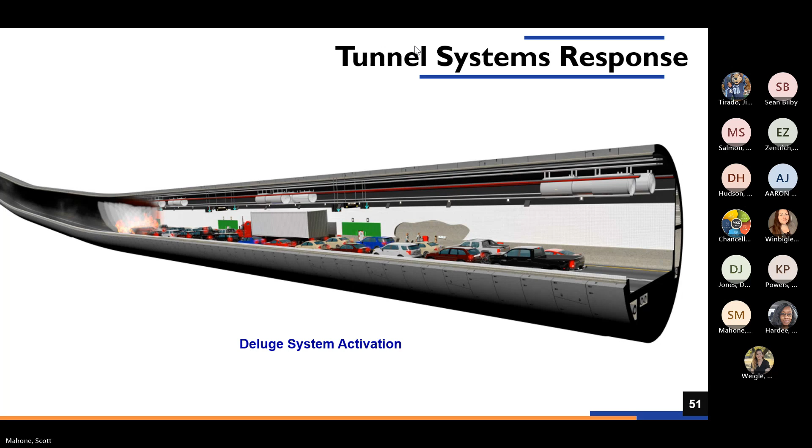So a little bit about the progress that we've made. Bradley kind of showed you where we're at in the heavy civil construction side of the project. We're not quite there yet in terms of construction of all these systems. Once we get a little bit further along with the tunneling, we'll see these systems come online. So this being a design build project, the construction and design are happening simultaneously. They're able to stage parts of the design and construction to happen so that we're able to get out ahead of things with some of the heavy civil work.

So the design for the tunnel fire life safety is really broken into a few different packages. We've got interior structures, the fire life safety package itself, which has the fire protection systems and the emergency ventilation, most of the mechanical systems. We've got the tunnel electrical power design, generators, the electrical feeders, all of those things. And then we've got the tunnel communication system with all the fiber in the tunnel, the emergency communication systems, the SCADA system. So all of those are kind of in these different design packages.

We've now gotten through the interior structures and the fire life safety package. The design is complete. But we still got a couple of things pending to get the design finalized for the electrical and the communication systems, but we expect to have that finalized in the next couple of months. The last thing is the tunnel buildings. A lot of the systems are within the buildings that are located on the islands. We have what's called a ventilation building at each tunnel approach, but we also have a traffic operations center building on the North Island that has the primary control room space for VDOT to work in. So that final design is still pending as well. But again, here in the next few months, we're hopeful that all of that will actually be finalized.

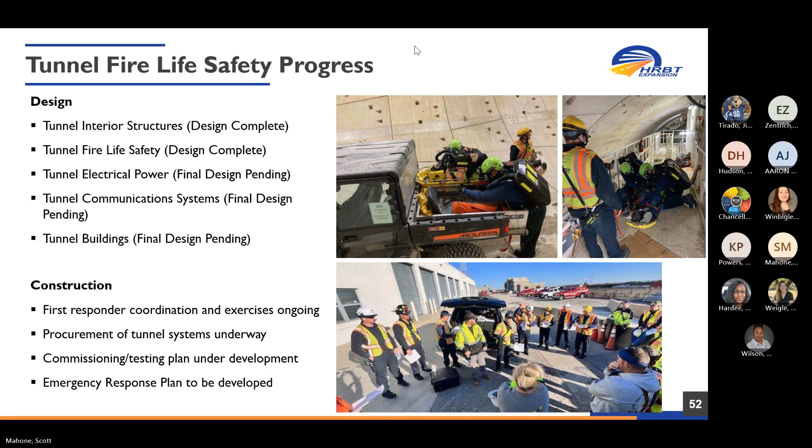So that's really all I've got, but happy to answer any questions that you may have. Nothing yet. Okay. Well, if they chime in, we're happy to help.

This is fascinating. I found this great. As I said before, I had done a tour with the Chesapeake Tunnel, and it's amazing once you get inside the tunnel, all the different layers there are. As we drive through, we just see our cars, but on the inside, you can see all the electrical panel layer. And then as you go higher and higher, you just see everything that's involved in that. And it's amazing how you keep everything safe for us. So thank you very much for everything you do. And we're looking forward to the finished product, and we'll be watching it.